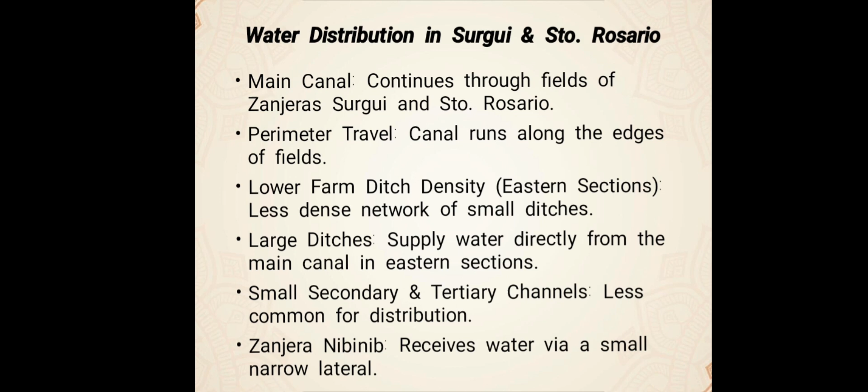Zanjera Nibinib receives its water through a small and narrow lateral that connects directly to the main canal at the shared boundary with Surgui and Santo Rosario. Both Surgui and Santo Rosario are considered to be at tail positions of the irrigation system, meaning they are at the farthest end of the main water supply.

And so, given the complex configuration of the canal system and the number of areas, analyzing the fair and efficient allocation of water among all 9 zanjeras is crucial. To achieve this, measurements of water flow or volume were required. These measurements were taken at 11 different sites across the irrigation system. These specific measurement points are visually represented on the map in figure 7, which is in the report of my partner, Miss Hasna.

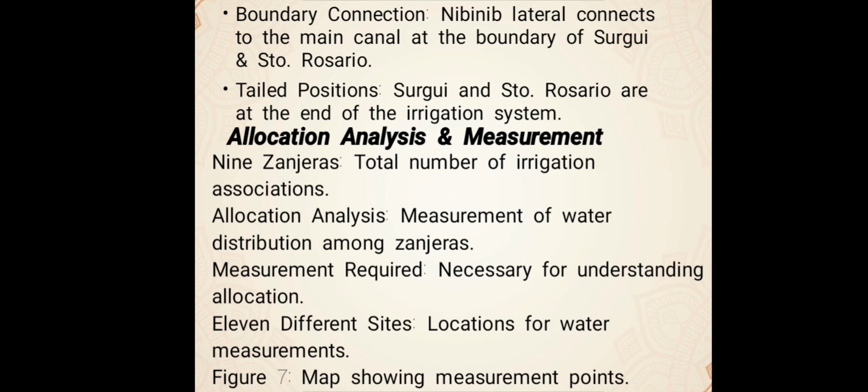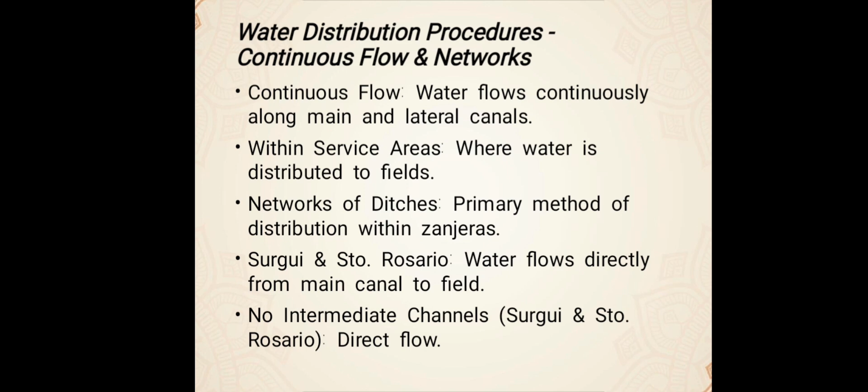Next is the water distribution procedures, continuous flows, and networks. Water generally flows continuously along the main canal into the various lateral canals within the service areas of most zanjeras. Water is distributed to individual fields through a network of smaller ditches. However, for Surgui and Santo Rosario, the method is different. Water flows directly from the main canal to the fields without passing through any intermediate channels, indicating a more direct or possibly less controlled delivery.

Next is water scarcity management and cooperation. During periods of water scarcity, when the demand for water is high, delivery is managed by rotation. This process requires the cooperation of several zanjeras within the federation. True, not always all 9 zanjeras participate in a rotation. The specific configuration of the canal system dictates how rotation is implemented.

For example, zanjeras that share a common channel or lateral will often rotate water delivery among themselves. Additionally, zanjeras with adjacent laterals sometimes practice a rotational arrangement where one zanjera might request another to reduce its water consumption for a given period, allowing the first zanjera to receive the water allocation it needs.

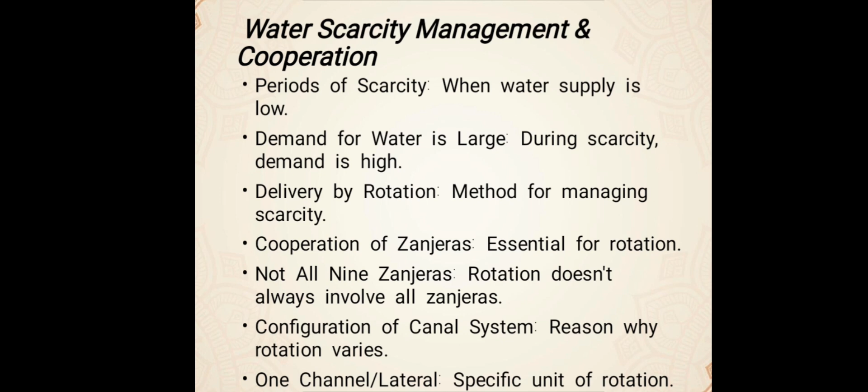Next is water control structures and maintenance. Water control structures within the system are primarily constructed using readily available local materials such as rocks, branches, and weeds. This approach makes these structures relatively easy to remove or repair as needed. When specific lateral canals or sections of the main canal need to be temporarily closed off for maintenance, to divert water to other areas, or during rotation, this is typically achieved by piling sand at the entry point of the sections.

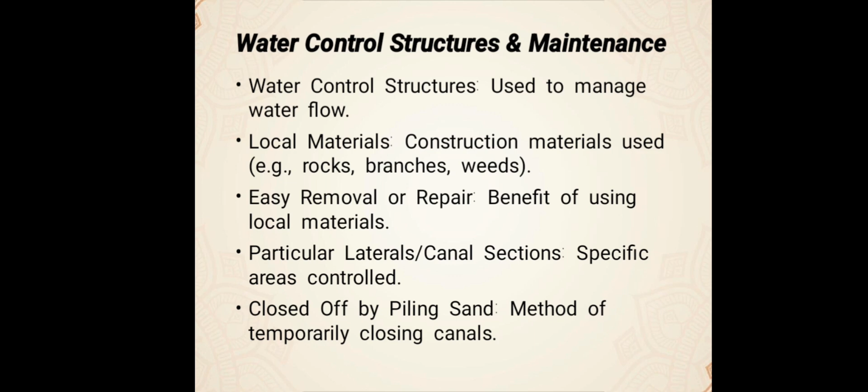Next is the water control structures and turnouts. The irrigation system utilizes simple water control structures made from readily available materials like rice straw, rocks, and assorted debris. These structures, often called checks, are built across the canal to raise the water level. At points where water is diverted into smaller lateral canals, known as turnouts, concrete slots are installed. These slots allow for convenient insertion of flashboards, which are essentially wooden or metal plates used to open or close the flow of water into a particular lateral.

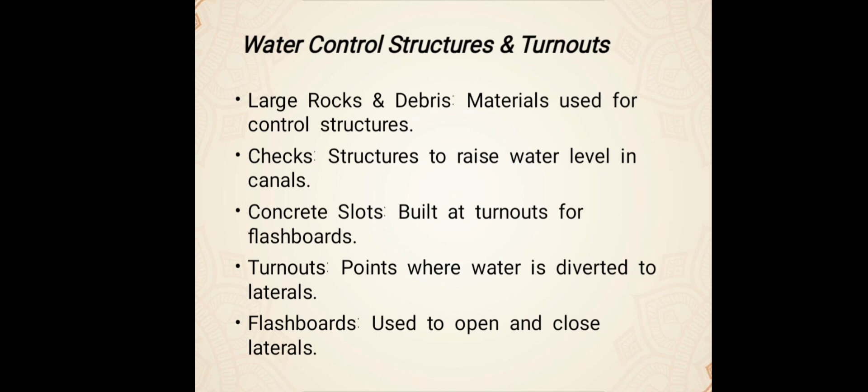Let's proceed to emergency water distribution. During times of extreme water scarcity, an individual zanjera can request special permission from the other federation members to temporarily divert the entire system's water supply to its own area for a specific period. This emergency procedure is accomplished by temporarily closing the lateral canals and establishing checks at various points within the system to raise the water level where needed. These critical procedures are frequently carried out during the night, presumably to minimize disruption or maximize flows, and typically involve only a few individuals to manage the process.

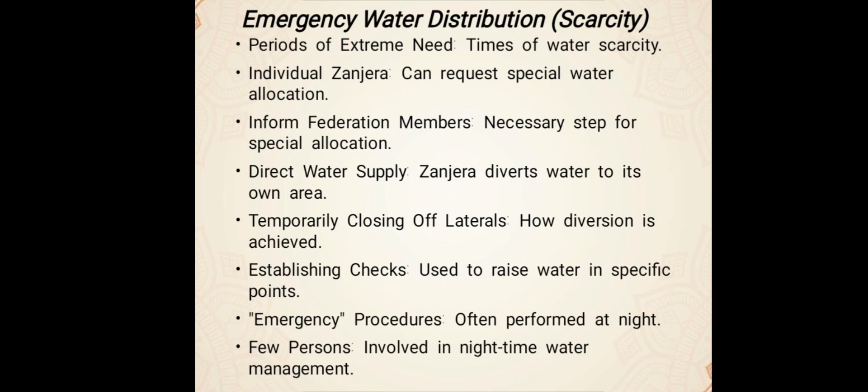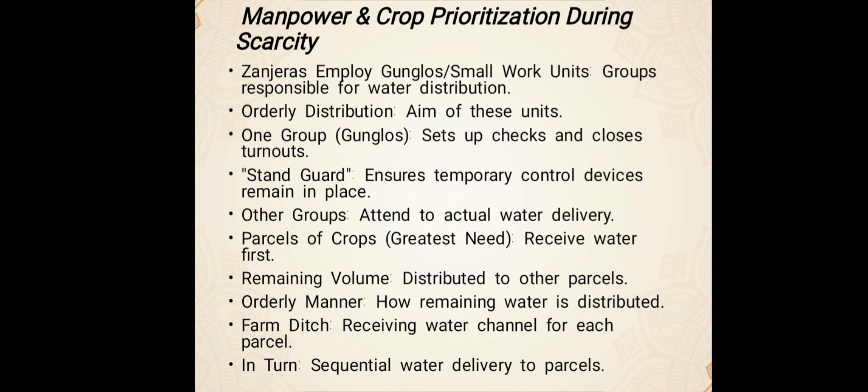The next is manpower and crop prioritization during scarcity. To manage the orderly distribution of water, especially during scarcity, zanjeras employ small work units. One group is responsible for setting up the necessary checks and closing turnouts, and they stand guard to ensure these temporary control devices are not tampered with. The other group focuses on the actual delivery of water to the fields. During scarcity, parcels with crops in the greatest need of water are prioritized and receive water first. The remaining water volume is then distributed to the rest of the parcels in an orderly, sequential manner, with each parcel receiving water via its farm ditch in turn.

Next is duration and the system's return to normal. This scarcity management procedure can last for several nights, with different work units taking turns to perform the necessary functions of water management. Once all the parcels have been adequately irrigated and the period of extreme need has passed, the irrigation system reverts to its normal operating mode. The normal mode of water distribution is described as simultaneous, implying the water flows to multiple areas concurrently rather than through strict rotational or prioritized delivery.